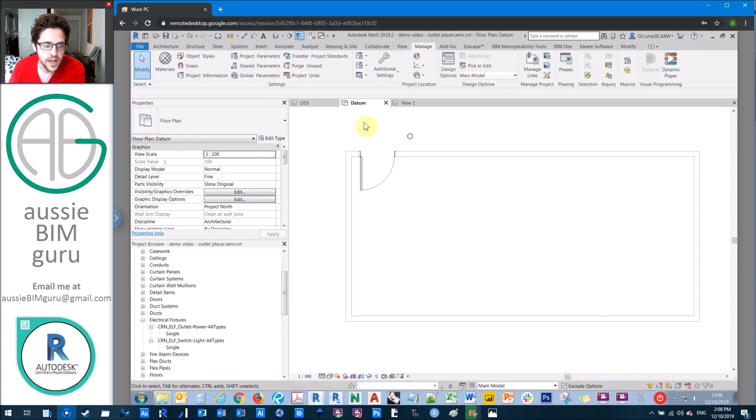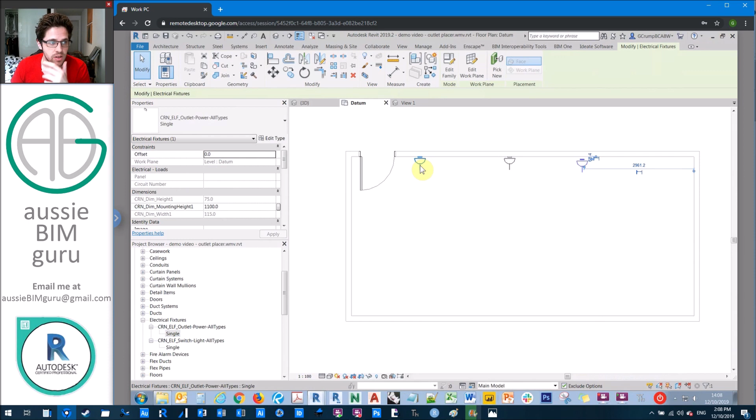So I've just got a model here where I've set up a room with a door, and I've got outlet families I can place. So obviously if I was in a project, I would usually have to go and place these one by one, and if I wanted to place them at specific spacings, I'd need to measure this myself, and obviously it's quite clunky. My outlet family actually isn't wall hosted. I prefer to make these standard level hosted families because I find it easier to control them and to host them in nested families as well.

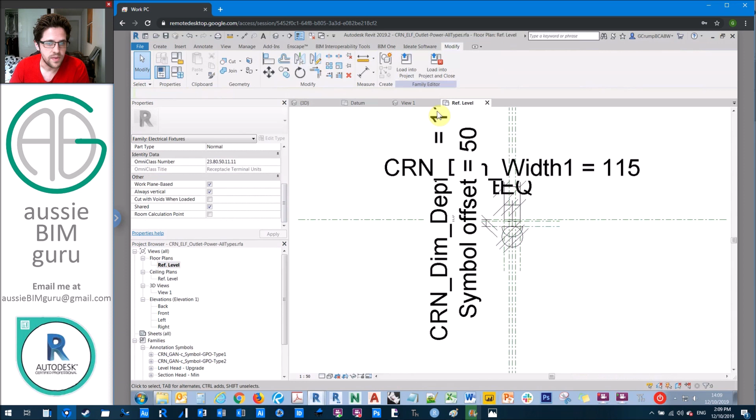So essentially this is the outlet family I'm using. It's really just an extrusion and a couple of nested symbols if you want to build one at home, and it has a symbol in plan which shows you that it's a GPO, and essentially that's all it is. And it's work plane based, and it's a shared family. So if you want to replicate this workflow, you'll probably need a family built in a similar way, so not the default Autodesk outlet.

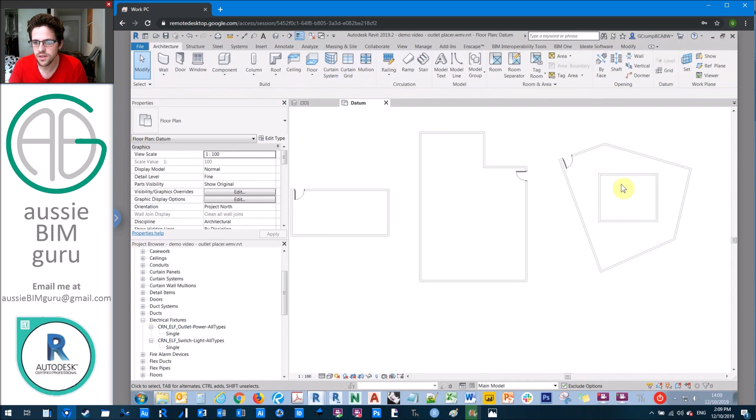So what we're going to do is we're going to try and build the script so that it can handle a few different shapes of rooms. So I've made some more complicated room shapes here. I believe it won't work for rooms that have a torus in the middle, like a donut shape. So if the room was a bit more like this, it may not work. So just keep in mind that this is built for more generic shaped rooms with a single boundary. Okay, but let's just jump straight into Dynamo.

So the first thing we're going to do is we're going to get a door and a room. So we're going to use the Select Model Element tool for both of these. So we're going to get two Select Model Elements. Notice I'm running in automatic mode. So this script is okay to run in auto mode when you're testing because we're going to be dealing with geometry, so it'll be helpful to see that dynamically update as we go. Okay, so let's just call this select door and select room because we're going to be building this for Dynamo Player as well. And we'll right click these and we'll make them both inputs.

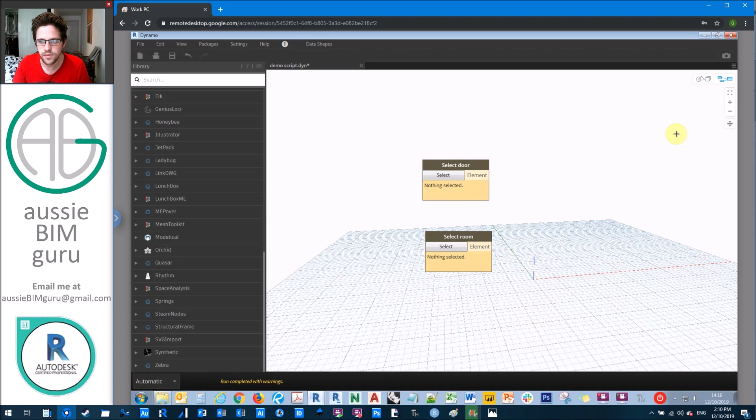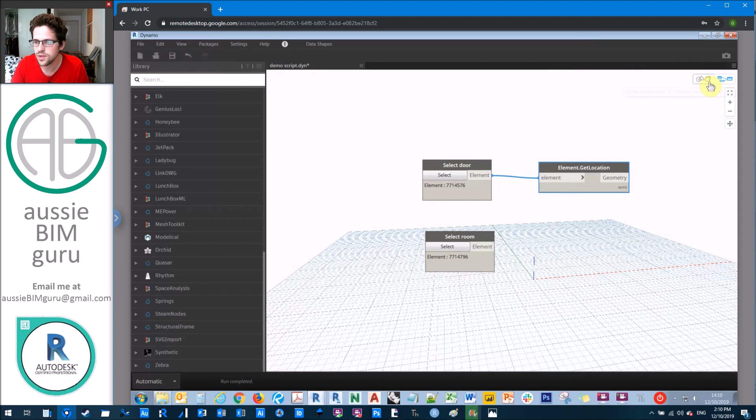Okay. What I'm going to do is just jump into Revit temporarily, and I'm just going to get the door and also get the room. So we'll select our door and we'll select our room, and essentially this should be enough for the script to work with. Okay, so what we're going to do first is we're going to get the door's location. So we're going to use Get Location, and this will give us a point for the door. So this is where our door is located in space. What we're going to do then is also get the room finish boundary, so we can see the outside of our room.

And we're just going to create a polycurve by joined curves. We'll just do a zoom fit. So now we can see our door and our room outline. But we're going to turn this into a polycurve by joined curves. So we're going to search for polycurve by joined curves, just to turn this into a single curve rather than a set of curves. And we'll just do a join tolerance of 0.

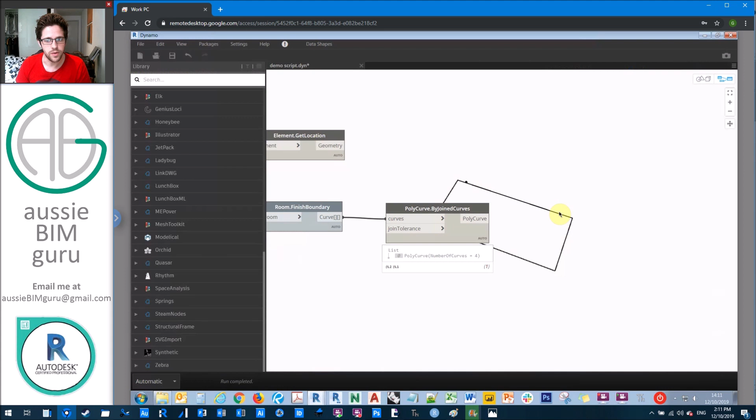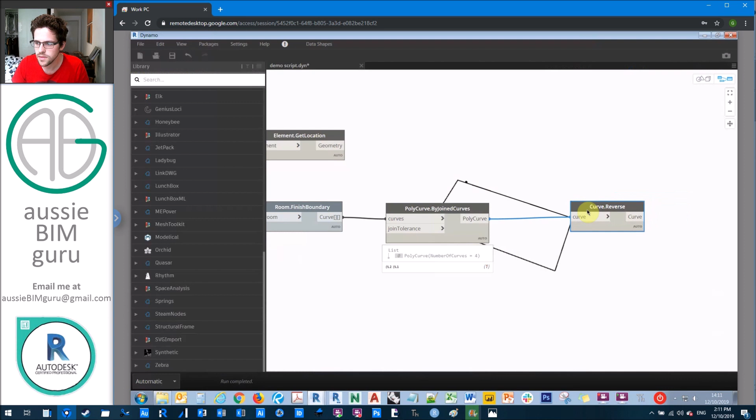Okay, so now our output we're dealing with is a polycurve, so we can work around this curve using the point parameters. So what we're going to do next is add the option to reverse the direction of the curve, because maybe we want to work clockwise or counterclockwise. So we're going to create a reverse node, and we're going to reverse the direction of the curve as well. And we're going to use an if node to let the user specify which way the curve should be going. I believe by default it goes in the counterclockwise direction, but we'll test later on.

So what we'll do is we'll feed in a boolean. Actually, it goes in the clockwise direction, I think. And we're just going to call our input a true false of clockwise. So are we going clockwise? If we are, then we'll feed in our reversed curve. If we're not, we'll feed in our standard curve. And we can continue on with whichever output we get out of this.

I'm not sure if there's a curve direction node that can show us. We might be able to. No, I don't believe we can. So I'll have to show you this later in the script. Okay, but what we're going to do now is find the closest point on this curve to the door's location. This is our starting point for our outlet placement that we'll offset to achieve our first outlet. So we're going to find the closest point between our curve and our door's location. Okay, so that should give us another point that's actually on the curve.

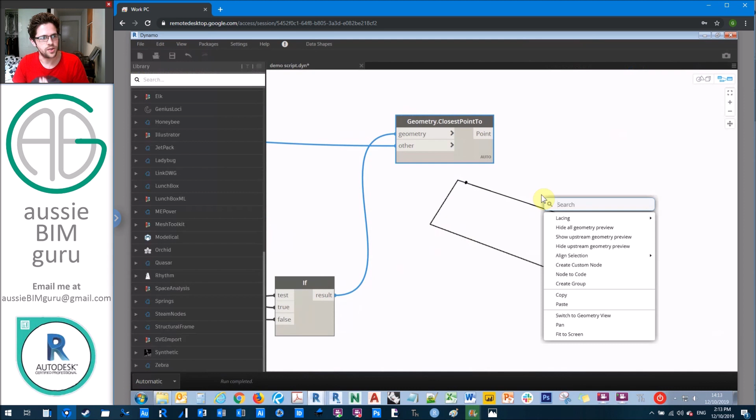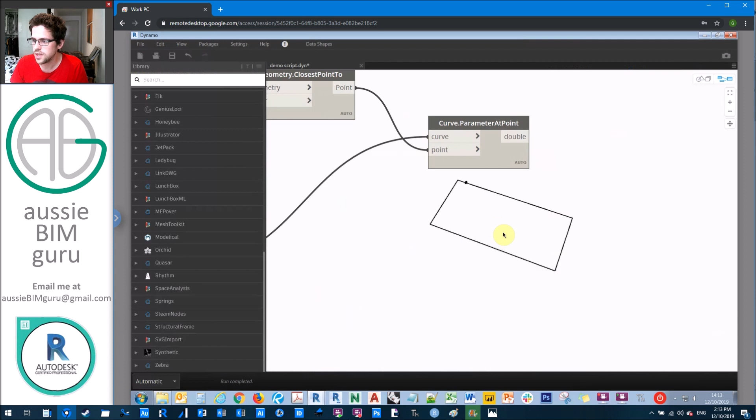So what we can do now is work with the parameters on the curve. So how far around the curve are we between 0 and 1? So we're going to get the parameter at that point. So at this point on this curve, what's our parameter? And we see that currently we're sitting at a parameter of 0.31. So we're about 30% around the curve from its start point. So what we need to do now is remap this so that we can keep working around the curve with an offset as well, and treat this as our start point, because obviously this isn't the start point of our polycurve.

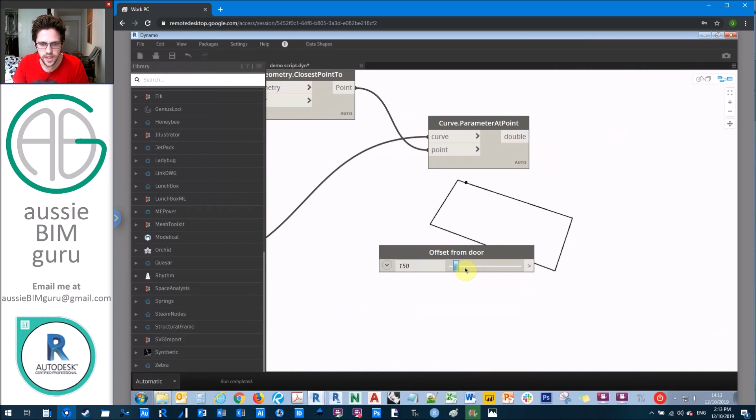So what we're going to do now is just create a number slider. And this is going to be our offset from the door. So we're going to call this offset from door. Obviously the door's location is the center of the door, which isn't what we want. So we'll do a number between 0 and 1500 with a step of 50. So this will let us specify an offset of, say, 750, for example, in this case. We also need the length of the curve. So we're going to use curve length to find out how far along the curve this will place itself as a parameter.

So now we know the length of our curve, our offset, and also the parameter at the point that we've specified. So we're going to create a code block formula at this point. We're going to say that the first parameter is equal to offset over length. So we're processing our parameter by the offset over the length of the curve to find out how much of the parameter is associated to that offset, because we need this to be a number between 0 and 1 in order to work with point parameters. We're going to say parameter 2 is equal to the point at parameter that we've got from previously extrapolating our door's location, and we're going to add on the parameter of our offset. So we'll get 3 parameters.

The first one is going to be our offset, our length, and our point at parameter. Essentially this gives us a method by which to find out where the offset parameter point is going to occur. What we're also going to do is set up a sequence to determine the spacing of all the other outlets around the room from this point.

So we need another code block to do this. We're going to say that sequence 1 is equal to 0, 1, and then hashtag x plus 1. Essentially we're establishing a sequence with the number of items within the sequence between 0 and 1 to be a number we specify plus 1.

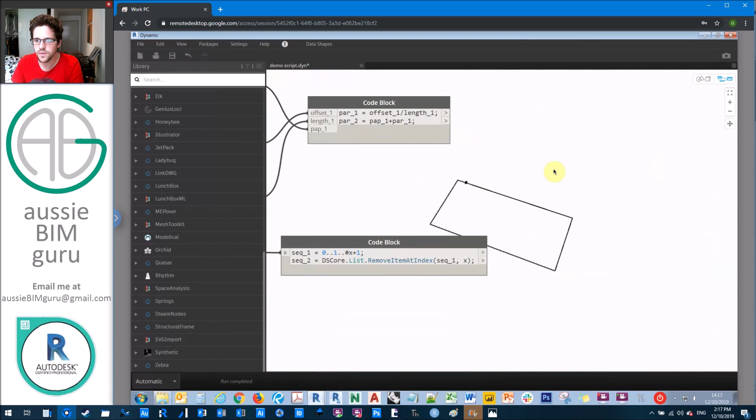What we really need to do is offset by this number. So we're going to do add, we're going to do plus to this number. We're going to add this number onto every single point in our sequence, and we're going to do our longest lacing. So we should end up with the points at parameter offset.

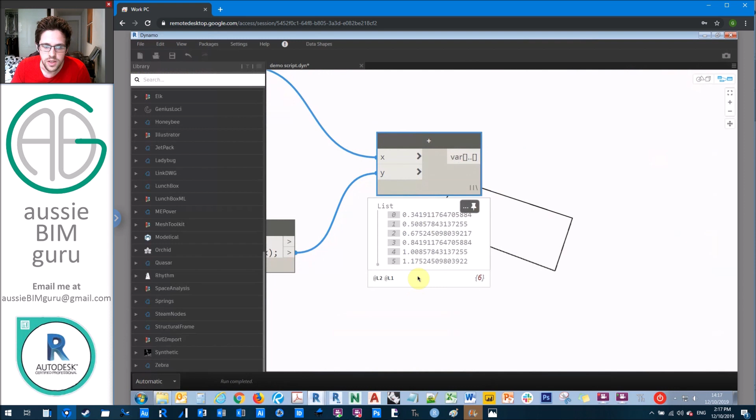However, some of these points are past 1, so they won't work correctly for a parameter at point or a point at parameter. So we need to make these go back down to below 1. We're going to make a little code block again. We're going to check if this number is greater than or equal to 1, because we want to process these. If it is, we're going to make that number take 1. If not, we'll just let it be that number.

So the only input we need here is x, and what we're going to do is feed these into an if node. We're going to test for this condition, and if it is true, if it's more, we'll make the result take 1, otherwise it will be the opposite. So what we'll end up with instead is a sequence with these last two numbers corrected down by 1. That's how we can process these figures.

So essentially what we have now is the parameters at point that we want to place our outlets at. So what we can do now is do a point at parameter. That's pretty much the fundamental part of the script covered. These are our parameters, and our curve is going to be our polycurve from back here. And what we should get now is a whole set of points.

They're a bit hard to see at the moment because our curve is in the way. But if I can hide these, and also hide this.

So the point at parameter needs to be our longest lacing. And there you go, now you can see all our points occurring around our polycurve.

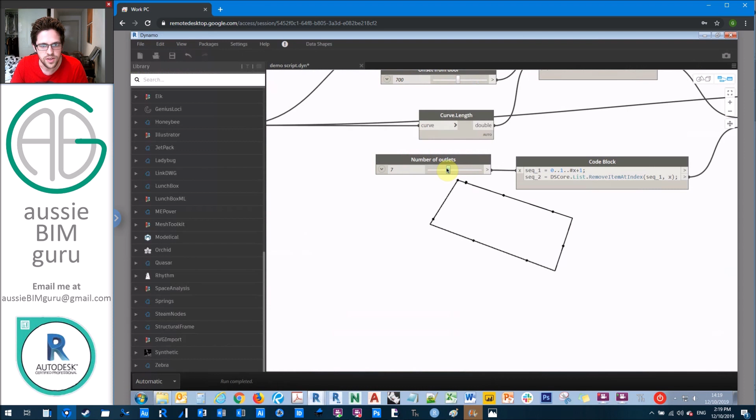So this is why automatic mode is important. Likewise, I can add more outlets to my room, and it figures out, based on the point at parameter formula, where these points are going to be to equally distribute themselves around the room. So pretty cool, right? That's the fundamental part of the script done.

What we're going to do now is also find out the normal to the curve at those parameters as well. So when we're at this point, we want to find out which way our normal is, because this is the orientation of our outlet, essentially.

So we're going to take those parameters, and also take our curve again, and do a longest lacing so that we get all the normals. So for each of these points, we now have their normal as well.

From here, we need to process these a little bit more. So the first thing we'll do is figure out the orientation of the vector. We're going to basically use another if formula, because I'll show you in a second the problem with what we get. Actually, I'll show you now.

So we're going to do line by start point, direction, length. Our start point is the outlet's position, let's just say the direction is the vector, and for the length, let's just make this a meter.

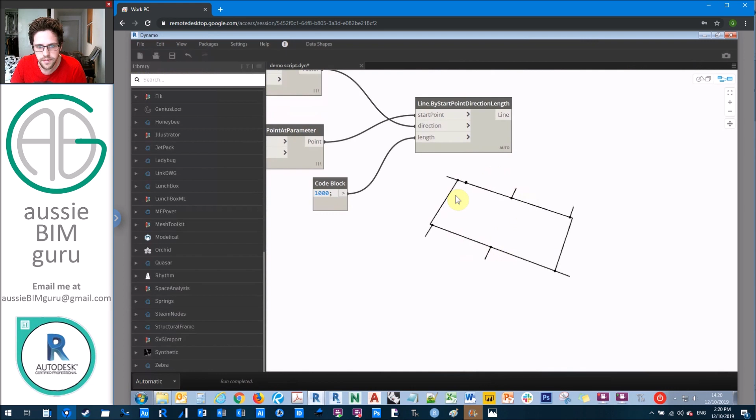You'll see that my vectors are all facing the wrong way. This isn't obviously ideal, everything is incorrect. So let's just move this around a little bit more. You'll see that we actually want these all to face the other way.

So what I'm going to do is feed in another if node. I'm going to take the reverse of my vectors as well. And depending on whether it's clockwise or anti-clockwise, we'll want to flip these.

So we need to get an if node again, and we're going to go back and extrapolate our clockwise parameter. So we're going to say if clockwise, and if clockwise is true, in this case, you're going to want to get the reverse vector, not the reverse curve.

So we'll get reverse vector. And if it is true, we'll get the reverse. If it's not, we'll just get the vector as it is. And this is the orientation you'll need for a front-facing family in order to be placed in the right direction.

From there, we need to process this vector to find out the rotation that the family is going to need to be rotated by in order to line up to this vector, because all families will come in facing to Dynamo's north, essentially.

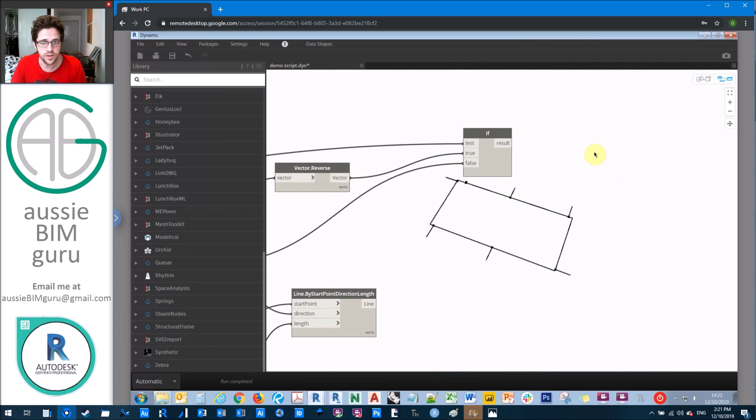So I'm going to create another code block. I've been using a few code blocks intentionally in this tutorial just to show you how code blocks can be used. So we're going to call on the y-axis vector, and then you'll need to put a bracket after it. I'm then also going to call on, I think I need to use a capital A there.

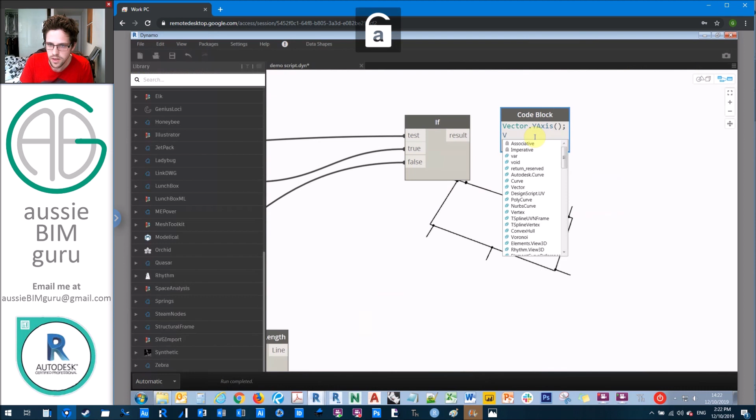Yeah, there we go. I'm going to just make a list of my vectors called vectors1, and I'm going to make vector and then call on the z-axis. So I'm going to feed in my if result as vectors1, and I'm going to find out the angle about axis. I'm going to be looking at these vectors versus the y-axis about the z-axis.

So that's essentially what I've built that code block to do. This will give me an angle that these need to be rotated by.

You can see we're getting some strange little anomalies here, these numbers that are almost 0. So I'm just going to apply a round function to this, rounding to probably the nearest, let's say 1 digit. We want decimals to still be allowed, we just want to get rid of those really small anomaly numbers.

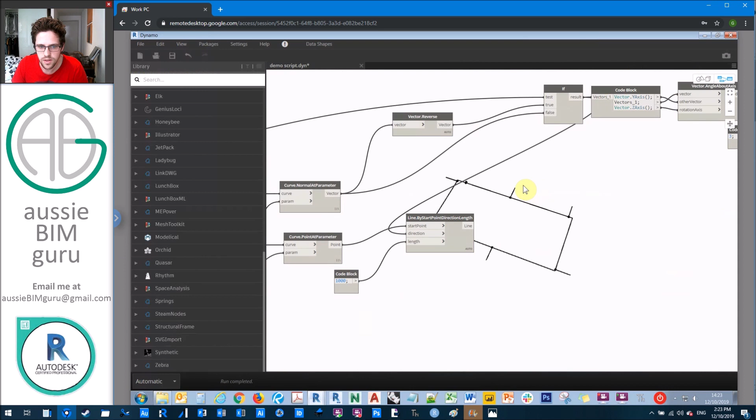And there you go. Now we can see these are the rotations that our outlets will need to be rotated by in order to position themselves inward facing to the room. I might just change this so that we can see the orientation of the outlets.

In this case, my outlet's been built back to front, so I'm letting my vectors be this way around. If you built the other way around, you'd just switch these vectors to face inward to the room. So test on your side with your family which orientation actually works. I'll just freeze this for now so we don't have to worry about it.

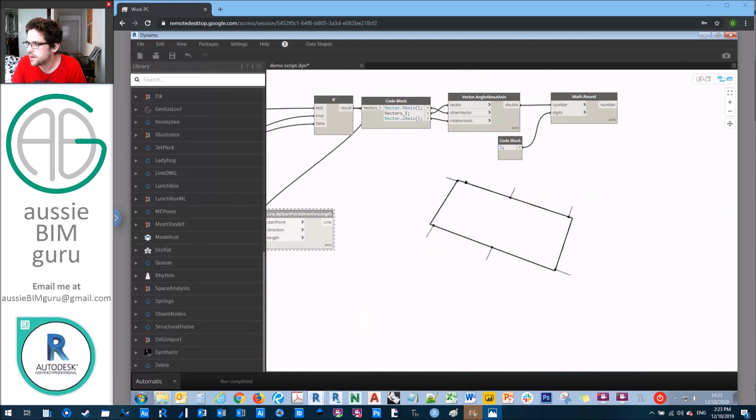Okay, so I've got my angle to rotate my family by, and I've got the position to place my family at. So I'm pretty much almost there. What I need to do now is call on a family instance by point and level, to place a family at a specific point at a specific level.

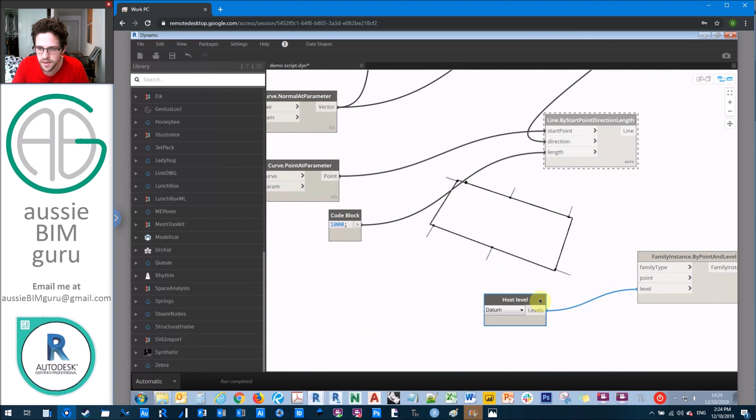In this case, I'm going to get a level, and for now I'll just place it at the level I'm working at, called datum, but make this an input and call it host level, so the user can specify which level they want to place their outlets at. Let's also specify longest lacing, because we're feeding in one level for multiple points for one family type.

So we're going to feed in our points, and I believe I might need to freeze this or go to manual mode. I'll go to manual mode because I don't want to run this just yet. I'll run it in a second.

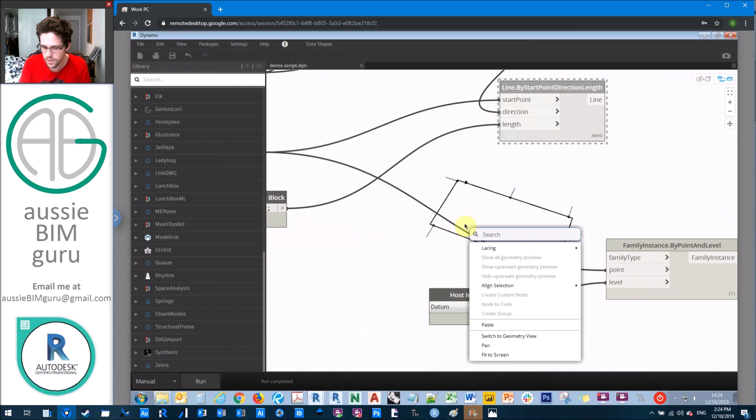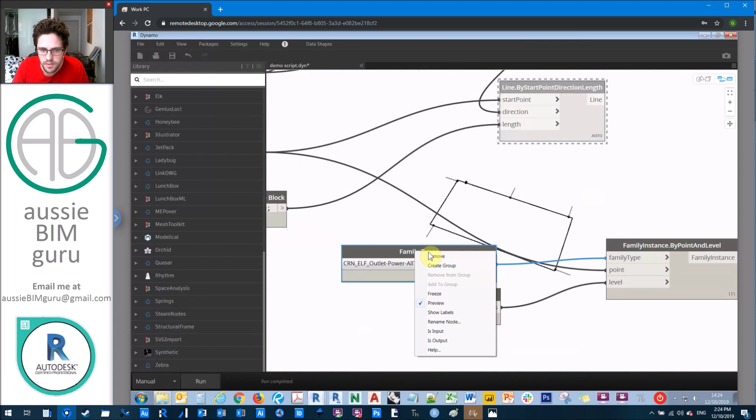So we're going to get family types as a drop-down so we can pick the family we want to place. I'll go to my electrical fixtures, somewhere down here - I've got a lot of families in this template. I'm going to pick my single power outlet, make that my family type, and make this an input as well. Let's call this family to place.

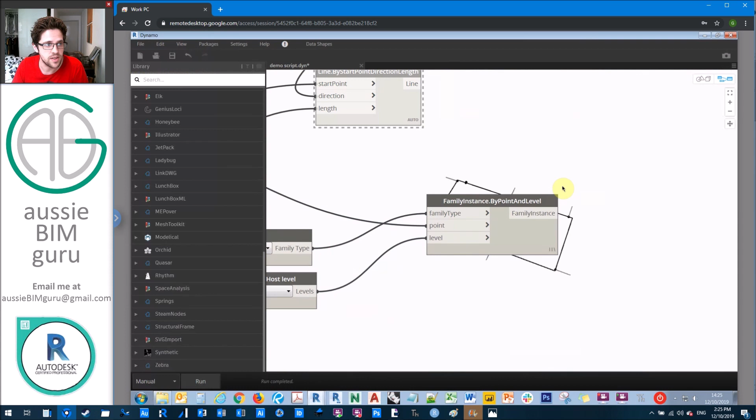So there's only two things left to do here. One is that I like to set up a formula that lets you specify the mounting height of your outlet. The way my outlet is built, it has a parameter that sets its mounting height. If I go up to component, I might need my properties browser back. If I place this here, you'll see there's a parameter called mounting height, and I can change this to change the height the outlet is placed at.

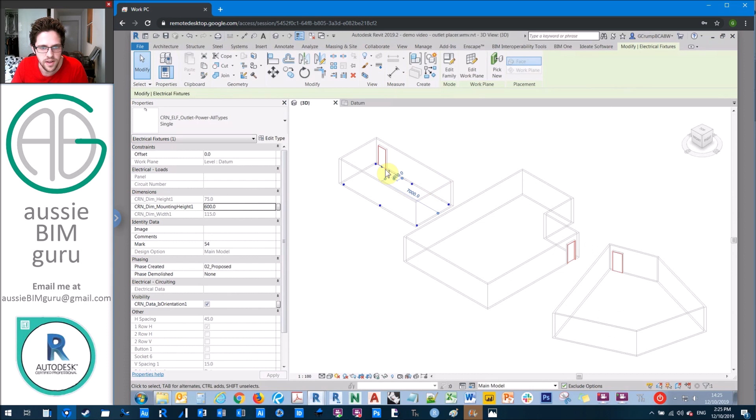If I zoom in here and go to 900, you'll see that my family changes height. So I want the user to have the ability to specify what they want that height to be.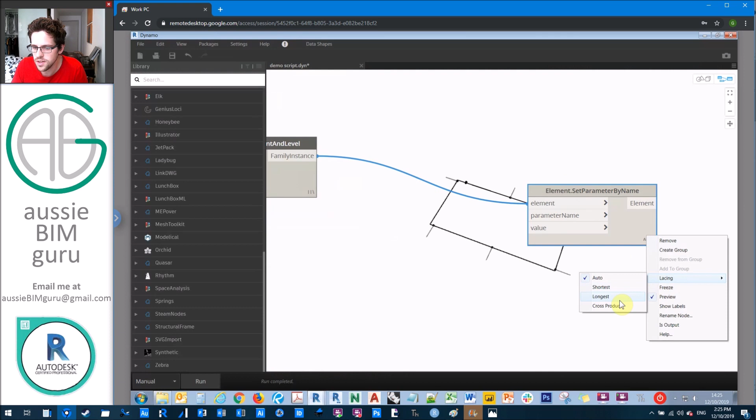So I'm going to get a set parameter by name node. For each of these families with the longest lacing, I'm going to set their mounting height by specifying my parameter name to populate. You could obviously use offset as well if you don't have a shared parameter set up to do this. Then I'm just going to get my specific parameter, in this case the mounting height parameter.

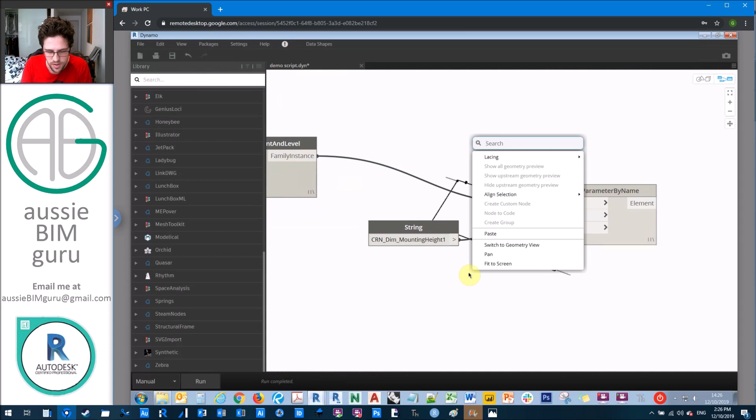And then the value - in this case you could do a number or a slider, it's up to you. I'll do a slider since I find users find sliders easier to work with. Let's let them pick a number between 300 and 3 meters with an increment of 50. This is a good way to force your users to use a fairly rational placement height. Let's make it 900 by default, and we'll call this mounting height.

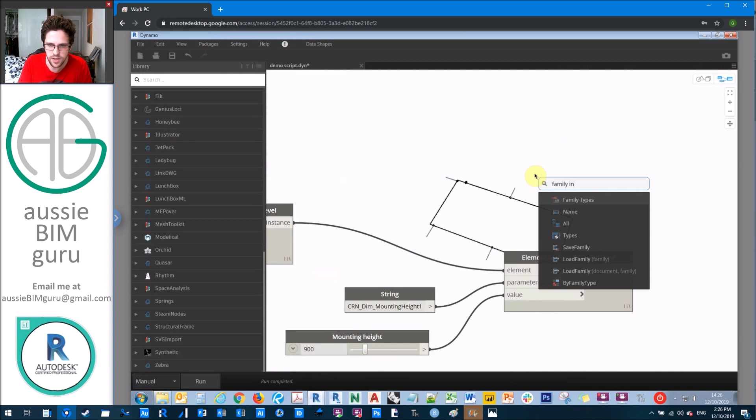And then last of all, we'll use family instance set rotation, taking these family instances and setting their rotation to the number we've calculated up here. So essentially once the families are created, they'll be rotated and also have their mounting height set.

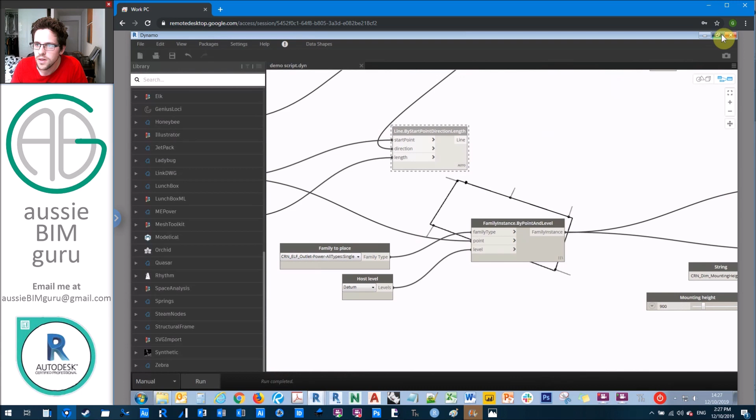So let's run a quick test outside before we use Dynamo Player. I'll just minimize this so it's a little bit out of the way.

And I'll zoom out and let's just try running this and seeing what happens. Cool, there you go. So you see all our outlets got placed at the right rotation and also at the mounting height that I specified as well.

So really powerful. But let's run this through Dynamo Player now, just so we can test with some other rooms. I'll show you how it looks to run it through Dynamo Player, because you'll probably do lots of rooms at once. Obviously you could change the script to handle multiple rooms at the same time, but I think doing room by room is safer, because then at least people get to think and review what they've done.

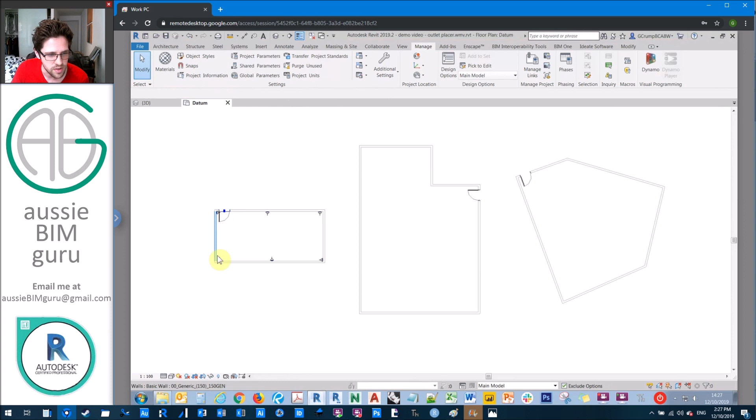You can see here with this specific orientation, we went counterclockwise. So we might want to go clockwise in this room, for example. This one here will go clockwise.

So I'm just going to navigate to my folder in Dynamo Player, and let's just expand the inputs for our script before we run it. I think I've set all the inputs I need. Sometimes I forget one or two and have to go back into Dynamo and set them as inputs and then reopen Dynamo Player, but fingers crossed I've got them all this time around.

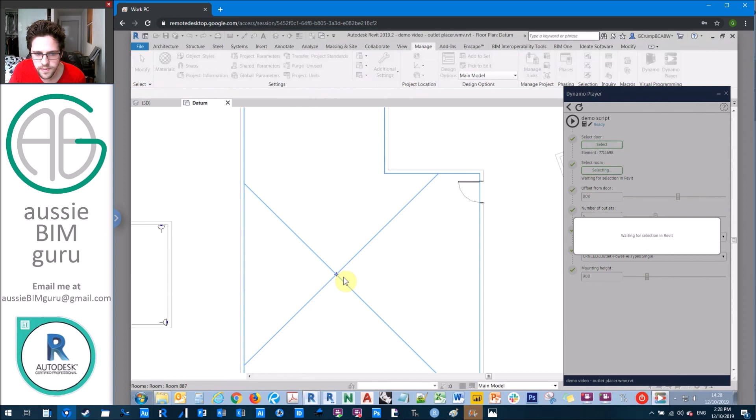Cool. Okay, so I think we've got all our inputs. So we'll select our door, we'll select our room. Let's just say we want a 900mm offset from our door, and let's say we want 12 outlets hosted at datum level. This is our outlet type at 900.

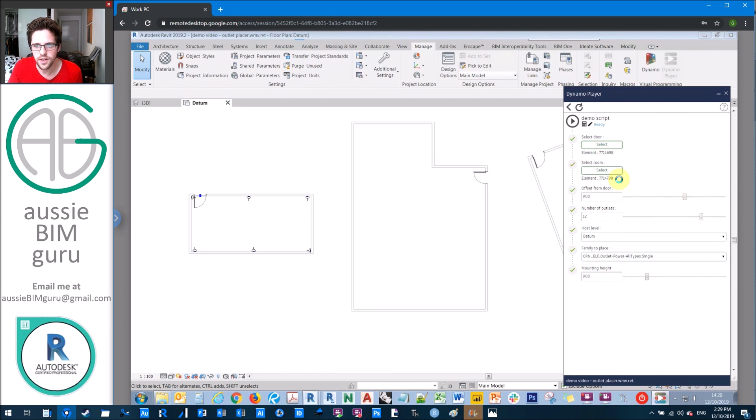It looks like I've forgotten my clockwise, anti-clockwise control, so I'm just going to go and set that really quickly. You can actually go straight to the script with this little edit in Dynamo button, which saves a little bit of time. It means you don't have to close this, reopen Dynamo, etc. It can take a little while to open because it is accessing Dynamo again.

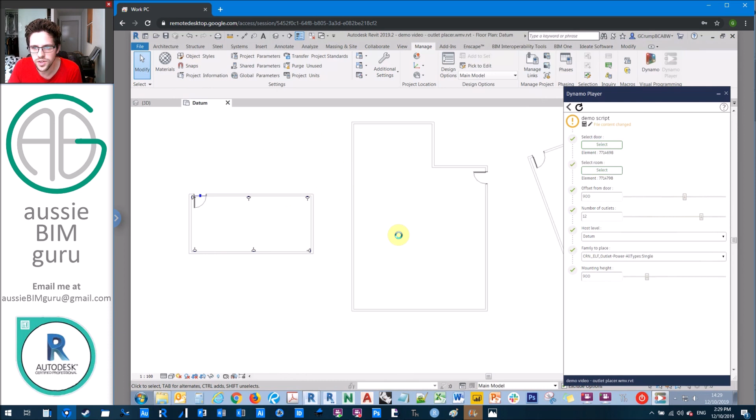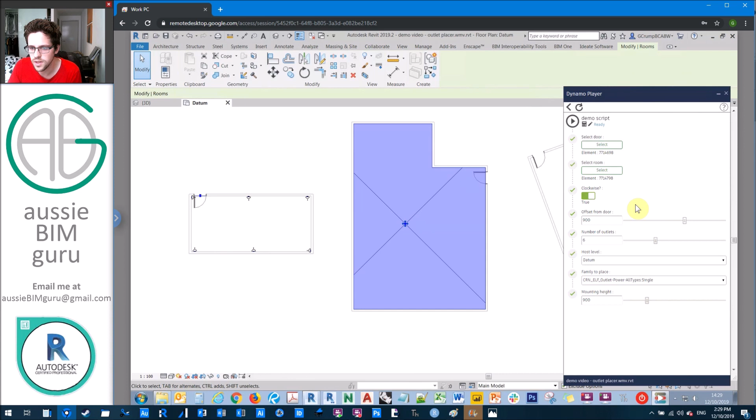Anytime now. Cool. So let's just set our door, our room, and let's just say we do want to go clockwise with an offset of 900, 12 outlets, and mounted at 900. And let's play. And there you go, it's placed our outlets. So how quick was that?

Cool, right? And you can just go in and obviously change these into other types of outlets if you know you need a light switch at the entrance. Just toggle it over to your light switch family and you're good to go.

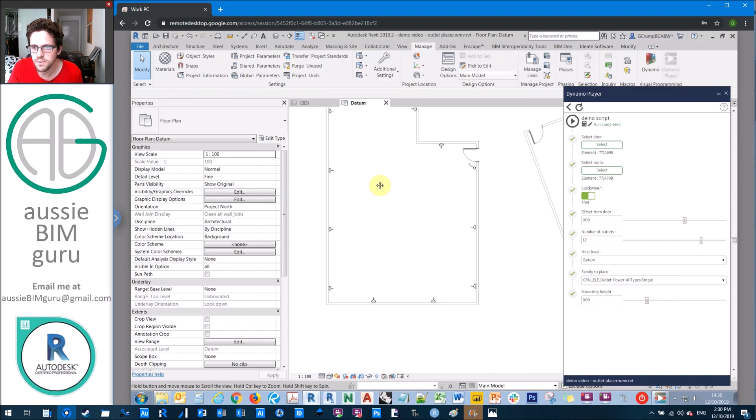Likewise, it can handle sort of more wacky room shapes because it's really just processing the finish boundary. So it doesn't matter what shape it is. And you're just going around the boundary in a clockwise or an anti-clockwise order.

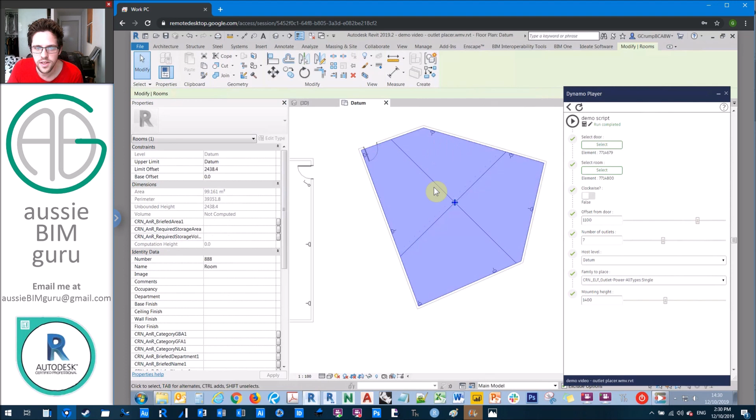Let's go anti-clockwise. It's offset by 1100, and let's just do 7 outlets, and we'll just mount them at 1400. Play, and there you go. They're placed. So how quick is that? Super easy, super intuitive. You'll see that those ones we placed a little bit higher, and there you go. You can see that mounting height parameter has been populated by Dynamo.

So really cool and really effective, I think, and should help some of my engineering followers out as well, hopefully, especially my electrical engineer followers.